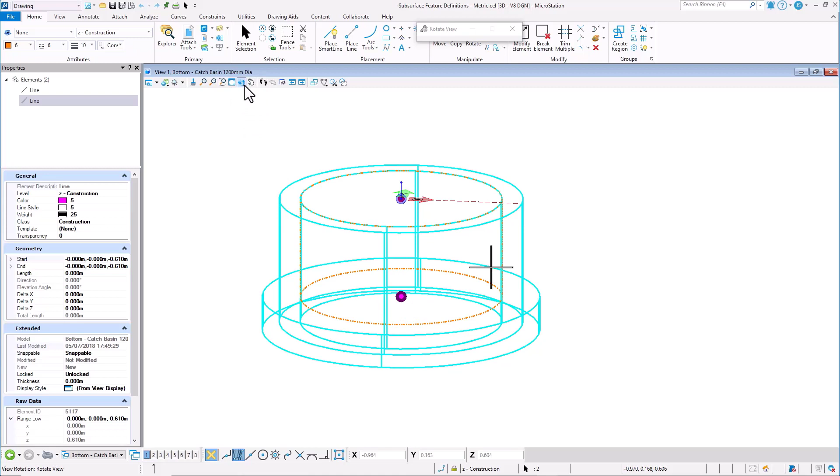Let's start with a quick look at the cell that's going to be used in my feature definition in a moment. I've selected the construction class line style 5 point, and you can see it here. If we go to perhaps a front view, you can see how that point is coincident with the base of the chamber.

Now let's look at our calculation options. Here's the new option to apply the sump depths to the inverts, and here's a setting for where the sump depth is measured from.

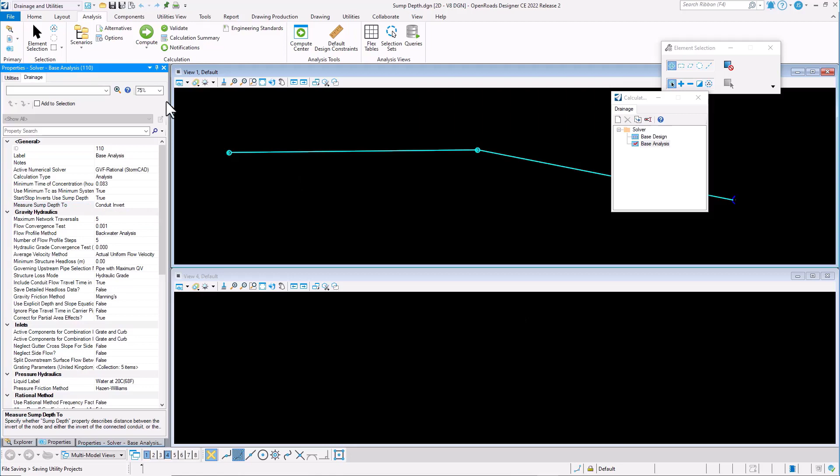So now let's place some new manholes. The feature definition I've chosen has a sump, so we'll place 2 nodes. Now let's place a conduit between them.

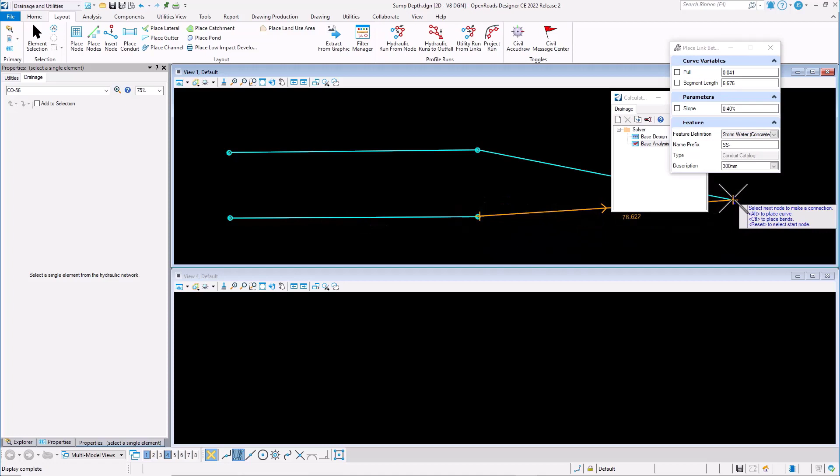So if we select a node here and we review its sump depth, that sump depth is 0. This one isn't 0. If we go back to that node and we review the inverts, you can see that the invert of the node matches the invert of the outgoing conduit.

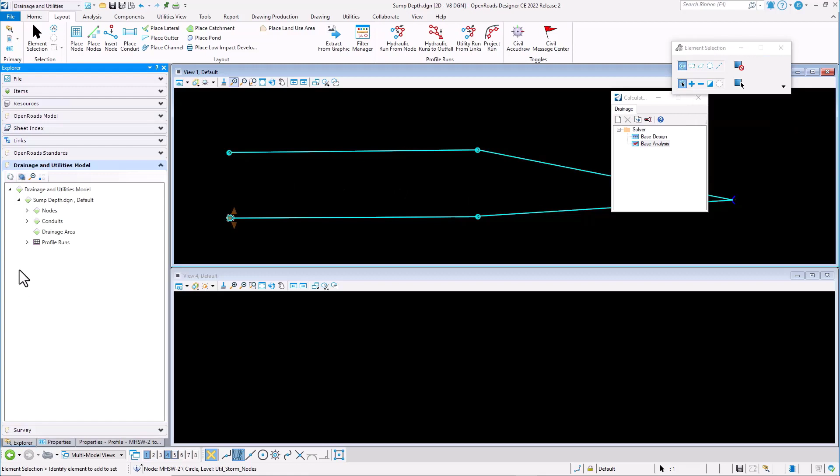If we select this node that we've just placed, you can see that the invert of the node is lower than the invert of the conduit by the sump depth. If we create some hydraulic runs, we'll accept those, and then we'll review them.

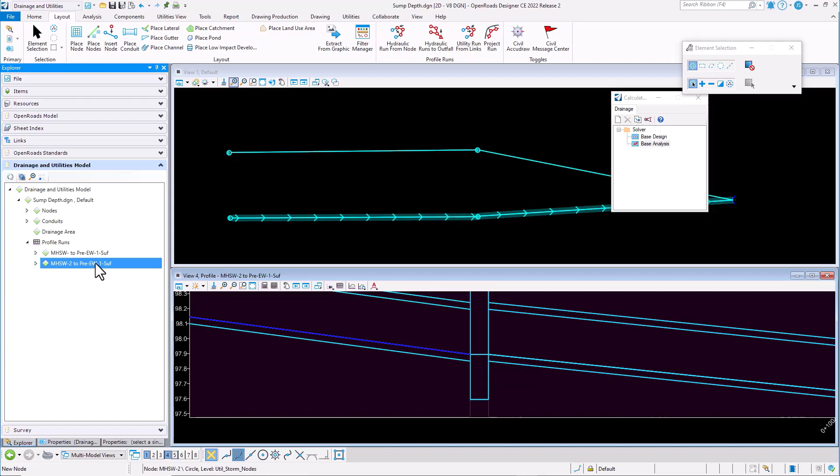Here's the first profile run across the top here, and we can see how the invert of the conduit matches the invert of the node. But on this second profile run, we can see how the invert of the node is lower than the invert of the conduit. And if we look at the analysis profile, we can see the same difference reflected there as well.